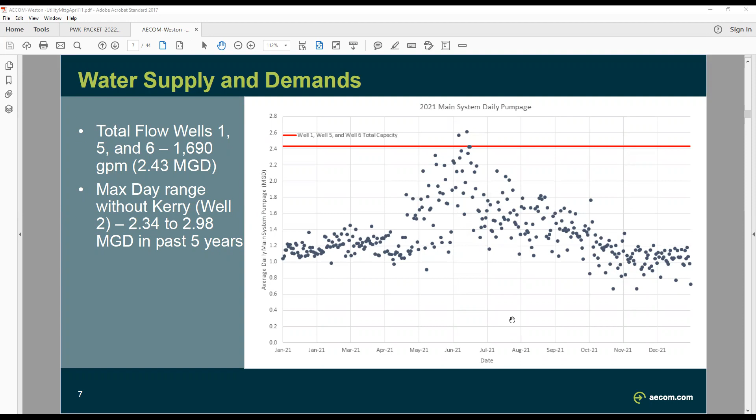I think we're getting off track here. Maybe we should let her get back to that in just a second when we get to treatment, because I think it'll be clearer when we show the treatment stuff.

So to start, we talked about short-term alternatives. Why do we have to have a short-term alternative? For long-term things, if you wanted to design something now for the future, we can't put something in for long-term right away. Most likely it's gonna be GAC, and equipment supplies are 22 weeks out. We can't just go out and get equipment in and have it in by July for a 20-year life. So we're looking at short-term alternatives. Also, wells 7 and 8 won't be available for the summer, so that's another reason why something short-term is needed. And if we were doing long-term operations, just getting regulatory approvals from PSC for a long-term solution would probably be prohibitive. So we looked at 3 alternatives right now for short-term.

So you mentioned demand reduction, doing some sort of public engagement or ordinance to reduce your water demands. But if it fails, if your levels get too low in your towers, someone's gonna have to start well 4, because that's the higher safety issue.

Basically, if you don't have enough water in your system and you were to drop pressure, you would have to send out a public notice to all your customers, and a pressure drop in your system would be very bad if you ran out of water. So running well 4 would be a better alternative if you hit that high demand period and didn't have enough water. That would result in a notice to all your customers. However, if you're successful, then you don't have to worry about that for the year. There is a concern about running 3 wells at high capacity for that longer period of time. It's hard on the equipment, so you could see some issues with that.

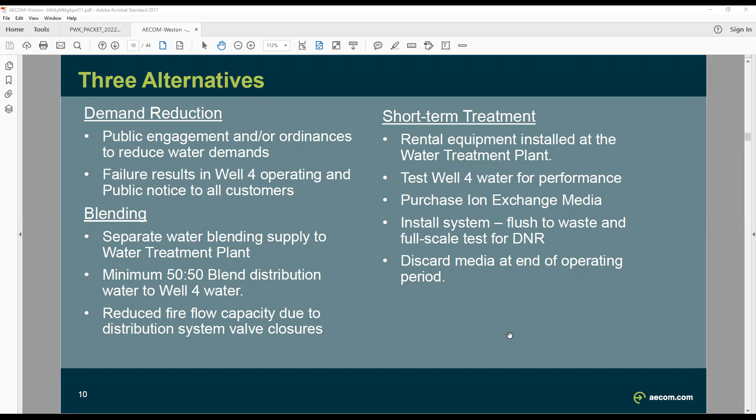The last option, and the least favored of the 3, is short-term treatment. There is rental equipment available. Sounds like not a ton available, but there is one available that could treat well 4 with ion exchange. We'll talk a bit about why that is in a moment. To do that, we flush to waste, and then at the end, when everything's done, we discard the media. So I talked a little bit about blending.

I had one quick question: if well 4 had to go online, that wouldn't need a notice, so what if it's below 20, say it was at 17? That's because the health index is above 1. Even though it's below 17 on individual compounds, there's a limit set for each compound. There are those 33 I mentioned, and not all 33 have limits, but some do. So if you're close to the limit on multiple compounds, it dings you. PFOS was one you guys were very high on. So you're really close on a couple of compounds, and you end up over 1 on your health index. In order to get below that, you have to blend the water, so yes, you would have to send that notice.

This information details on blending. The initial review was not what I was hoping to see, something great like a slam dunk, no problem. But no, it's gonna be a little more challenging.

We're doing the modeling review on that. There would be a new... that's one of the questions, I apologize. Is there any need to test more than once?

In other words, is it pretty definitive that you pull a test on that day and that's representative? Or does it make sense to look at, I don't know if this is seasonal. We just sampled again today, actually. In order to, how much effort is it, because when you turn it on, you have to plan where you're gonna send the waste to.

Yeah, so we blend it. We sampled today, but in order to do that we had to pump wells 3 and 4 to get our samples to the treatment plant. Then we pumped the treatment plant to sanitary, where we had to notify Rib Mountain Metro that we were gonna do that per the DNR request, that we couldn't pump it into the system or out into the yard anywhere. So that went to the sanitary, which goes to Rib Mountain Metro.

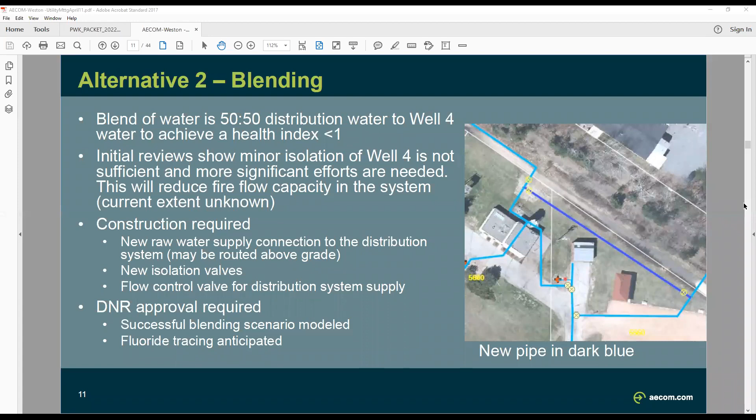Next, this is the short-term treatment. I wanted to explain where we've done short-term treatment before. In New Jersey we did a short-term process where we put in ion exchange. Ion exchange vessels are smaller, we can fit them in spaces better, and we can get equipment faster. However, long-term GAC tends to be more cost-effective.

This is an example of the alternatives analysis they went through for the evaluation, but I just wanted to show you what the equipment looks like. This is an example of ion exchange equipment, it's kind of short, a pressure tank. And above it is GAC equipment, much larger. Right now those are fairly challenging to get.

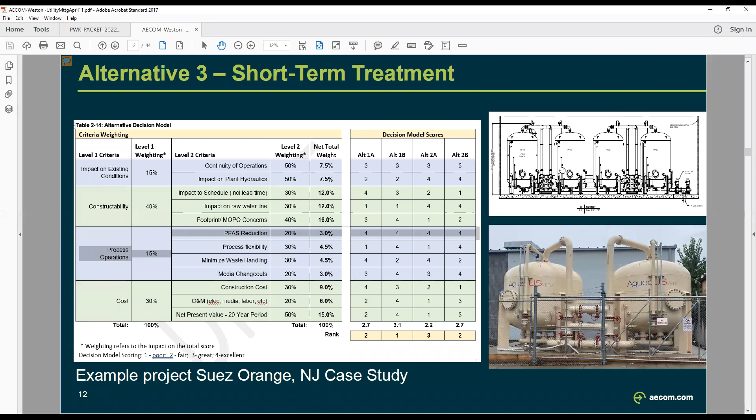So what's available right now is rental equipment for 4 vessels that could treat between 400 minimum and up to 748 maximum gallons per minute, depending on the loading rates we can get, our response from DNR, and our bench test. The rental cost is reasonable, $5,200 per month, plus mobilization fees.

But the problem is media purchase tends to be rather expensive, looking at maybe somewhere around 90,000. They don't know how much it would cost to actually ship it to the site, they gave us a cost for media but not shipment yet, so we're waiting for more costs. Media disposal will be determined, so when everything's said and done, you have to pay to get rid of this.

And that is where we want to make sure we're very careful about how we dispose of the media and where it goes, so we mitigate some long-term liability. The equipment will be housed in the existing treatment plant. With this type of equipment, the well would have to operate continuously because ion exchange media does not like to start and stop. It must be run at a continuous rate. Starting and stopping the media can change the bed, it's just not good.

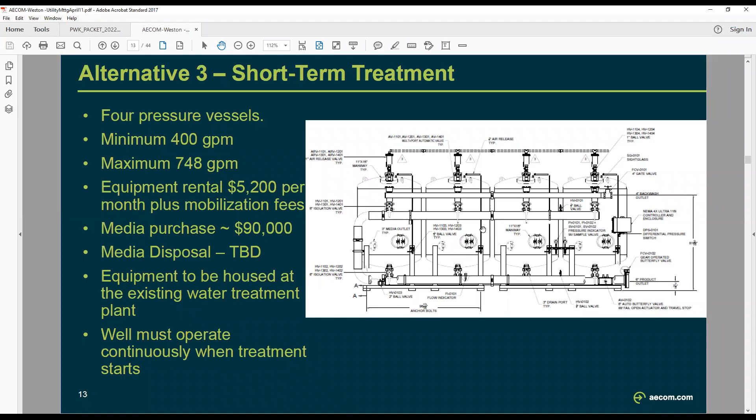We have requested quotes for short-term treatment equipment to find out exact costs and to meet regulatory requirements for posting contracts. Just a little bit about ion exchange. Basically, ion exchange removes all these good things, and as you go up, it's going to kick off other compounds as it starts preferentially removing PFAS.

If you are aware of the Central Sands region with Plover, Amherst, and Whiting, they all have nitrate treatment. If you look here, you've got nitrate. So it's similar to what they have for nitrate, but it's more selective. However, if you have nitrates or sulfates or other stuff in the water, it can change. That's why we're doing bench testing, to figure out what other stuff is in the water that might cause long-term issues. Sometimes nitrate, if it gets too high in your source water and it collects, it can do what's called dumping. We want to make sure that doesn't happen, that you don't have any weird water quality issues with your ion exchange treatment. That's one thing we do in the bench testing.

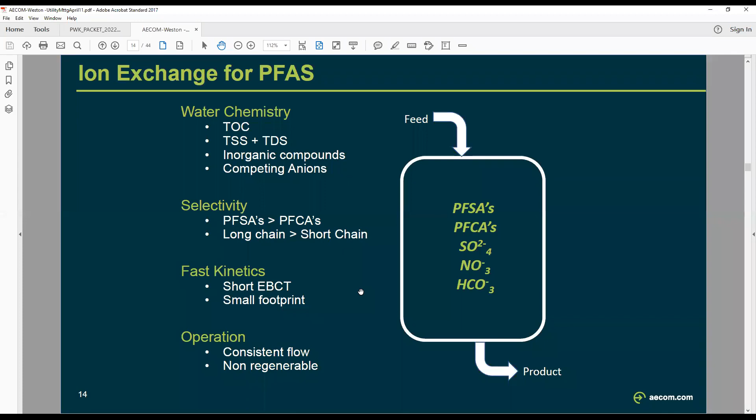One thing to note: if you have an at-home water softener, that's the opposite charged resin. It's removing hardness from your water. This doesn't remove hardness. At home, you can use salt to regenerate your water softener, but these can't be regenerated. You wouldn't want to anyway, because then you'd have to do something with the PFAS water, and that's just not good. So these are used to exhaustion, and then the solid media is removed and disposed, usually by incineration.

So you have manganese and iron, what about those? Manganese and iron are less of an issue — they would not be removed by the PFAS ion exchange media. Those would typically be removed by chlorination and then running it through an activated media like pyrolusite, manganese greensand. That backwash water, if it's done after PFAS removal treatment, would not have PFAS in it. If it's done before that time, it would have whatever's in the raw water in that backwash waste.

Typically wastewater plants don't mind iron and manganese at all. It's PFAS that they're concerned about — they're kind of in the same boat as many other folks, just trying to figure out what to do next. So as far as iron and manganese treatment, wastewater disposal is typically not a concern for the iron and manganese in the water. I think that should be part of the design.

For well 3, it would be. Right now, I'm just looking at well 4 for a short-term treatment process. Like I mentioned, we only have capacity for between 400 and a little under 750, and that's the capacity of well 4, which has the least amount of PFAS and no iron and manganese to treat ahead of time. So it makes it a much faster short-term option than long-term treatment.

But for long-term treatment, you're correct — you'd want to see iron and manganese removal. It'll help protect your ion exchange media if you remove that before you get to that media for well 3. Well 4, I believe the iron and manganese was below detect. So well 4, Sternberg, is much better water quality than Mesker, which is well 3.

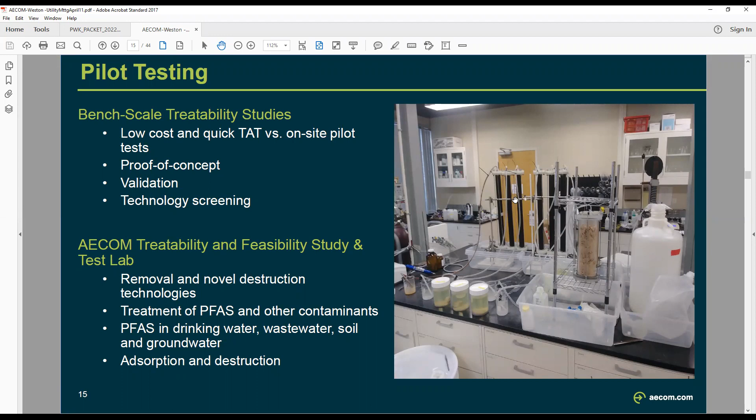So bench testing, just a little picture of what it looks like. We're going to run the water through tests. We'll do a full water sampling test that'll give us the information for ion exchange. The other option is GAC, and we run it through these little columns here, which you can kind of see on the screen. I won't go through all the data, but just know that. So I mentioned how much it takes to actually destroy it.

We're adsorbing this PFAS onto carbon or onto ion exchange media, but that doesn't actually destroy it. You can see this little tank here — we have two specialized plates that they put in the tank, and then they add electricity to the tank, and you can watch the color change. The fluorine-carbon bond is quite literally severed, but it takes a lot of energy for a little container, so you can imagine it's not really suitable for a large volume. But there are methods they're developing to actually destroy the compounds. I just realized how hard it is to destroy — that's kind of the reason why I put that in there.

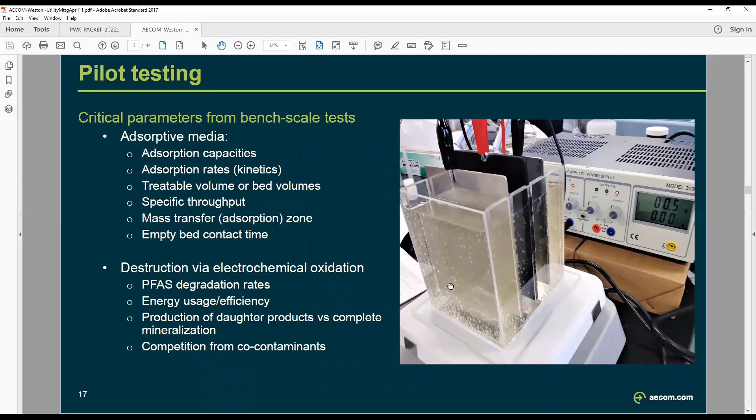Just a little bit else on some of our equipment that we have in the lab to do the tests.

So long-term treatment options, that's the short term goal to get you through the summer. Then the next step is what are you doing long-term. This week, the well 7 and 8 new well and building will be open for bids on Wednesday. We're hoping to see some great bids come in, a lot of activity, a lot of interest.

The idea here is that those two new wells will hopefully get you some additional capacity short term. Another option would be to construct a new well to replace wells 3 and 4 long term if that was the choice. There's no guarantee any well you select anywhere will not have PFAS - that's one reason why with well 7 and 8 we will be testing. And well capacity can be challenging, I'll talk about more of that in a second.

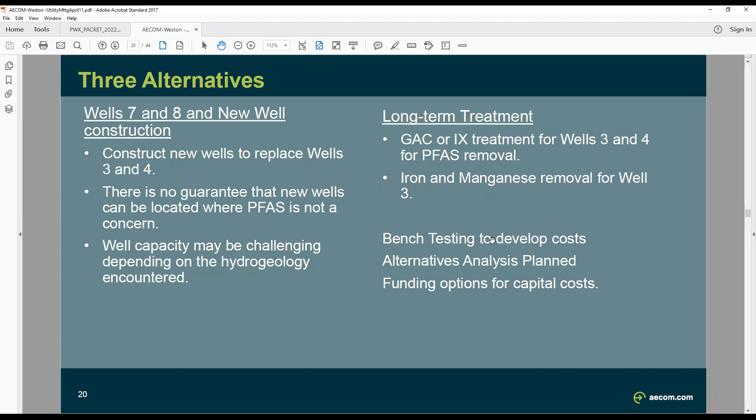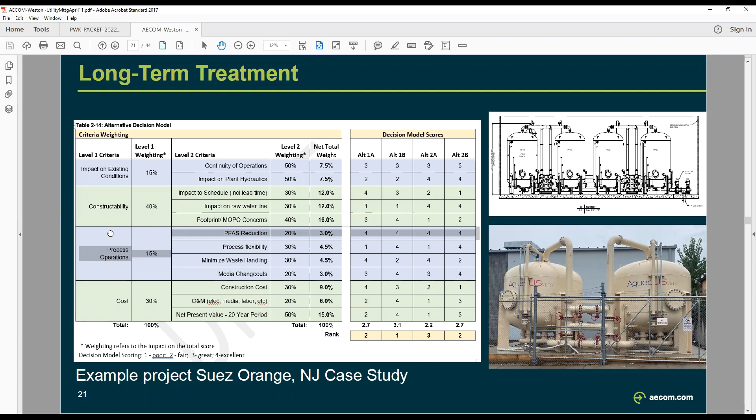Long-term treatment options include iron, GAC and ion exchange, and then iron and manganese removal. In all these cases, we'd want to bench test to develop the costs, look at alternatives analysis, and do some funding review. For alternatives analysis, we're looking at both cost, life cycle, capital cost, and also things such as constructibility and treatment performance in different non-cost factors.

So I already talked about pilot testing well 4, then well 7 and 8, which is heading to bid right now, opening Wednesday. Well 7 and 8 should be constructed this summer, then tested for PFAS. After we get PFAS results back that are favorable, we'll start construction on the well building. The wells are hopefully going to be ready by May of 2023 to provide water to the system.

So by this time next year, you should not be looking at a summer of concern - you should have that additional water supply available. We are anticipating that some other portions of the well may go beyond that. Currently there's some sourcing issues with generators - the generator may not be in the building before May comes next year because of some supply chain issues. But we're tracking that, and hopefully when we get the successful bidder, we can make some good schedule plans.

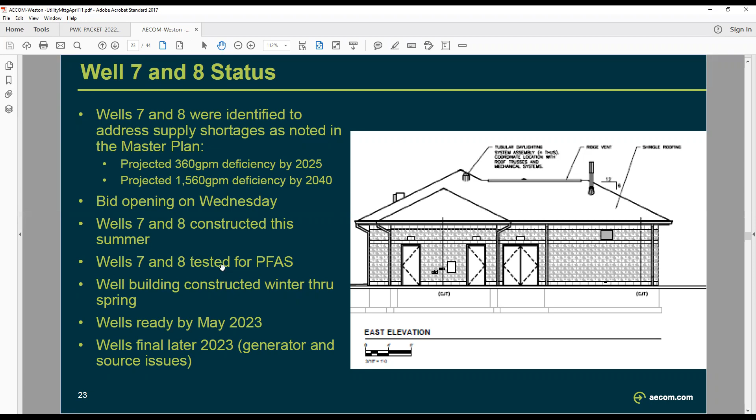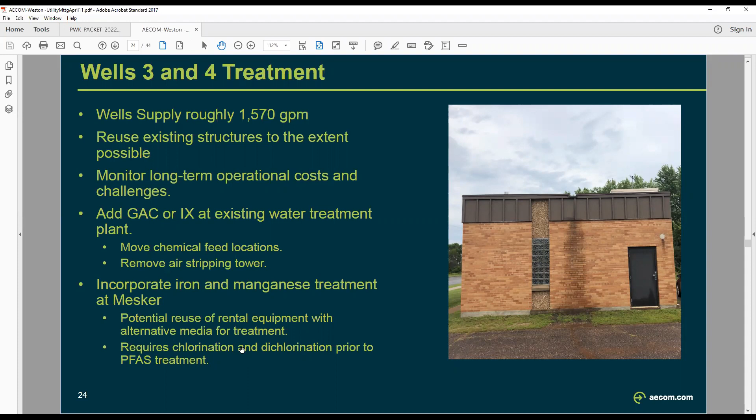And then the existing GAC or ion exchange at the existing water treatment plant - the existing plant was designed for GAC vessels, some tall vessels, so it should be pretty reasonable to get those new vessels in there. We would have to move chemical feed systems, and we would remove the air stripper for PFAS. We would incorporate the iron and manganese, and one item to note is that we probably have to chlorinate and then dechlorinate before PFAS treatment, just because both GAC and ion exchange do not like chlorine at all.

This is a picture of the treatment plant. You can see this tall area here is actually the area that was originally designed for GAC vessels and has enough head capacity for that.

So on to funding - the good news is that there is funding out there. Safe Drinking Water Loan Program is available. We have to get cost estimates and an intent to apply. The ITA is intent to apply, and PERF is the project evaluation and ranking forms, completed by October 31st. This is low interest loans and principal forgiveness.

I bring this up because of special funding options here. The requirements for this are disadvantaged business, wage rates, and then Buy American, which means we would have to be careful with where we're getting our materials from and make sure they're all American-made materials. I just finished helping the Village of Clover with their safe drinking water loan, and I've done a number in the past.

The reason why this is really interesting is right now the Infrastructure Investment and Jobs Act has put a lot more money into this program. So the money we're talking about is for transportation as well as water, even bridges. And you might hear some communication companies are excited because they can get communication lines run in rural areas with some grants from this as well.

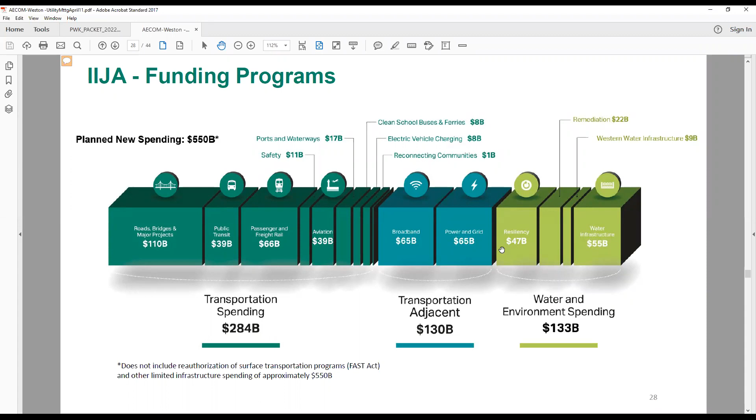But looking at water specifically, let's skip ahead a little bit. There's about 10 billion in collective funding to support projects that address emerging contaminants like PFAS. Of that, talking with DNR, they're looking at getting $13 million into their program for safe drinking water loan funds, specifically for PFAS treatment.

They're also talking 13 million for the general fund for the safe drinking water loan program. These are still kind of in the works, they're trying to still figure out the last bits of how everything's going to shake out, but that's per year for 5 years.

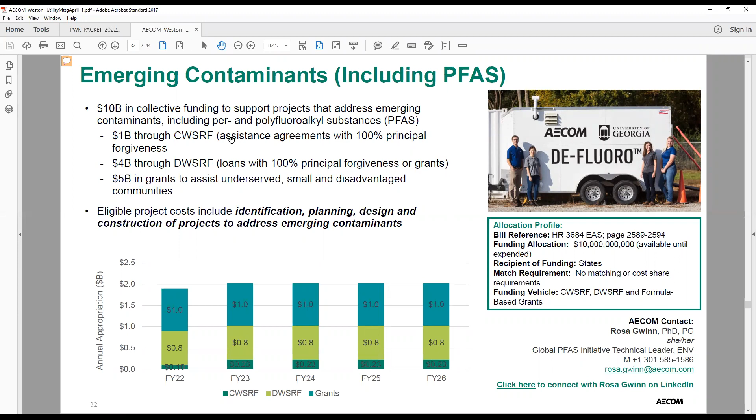So looking at when funding might occur, my guess is there's going to be a number of utilities that want to get into the mix. However, there's going to be multiple years of opportunity to be part of that program to get funding. This is funding for your capital costs, so funding for your equipment. This would not fund your long-term operational costs, which can be kind of high because you have to replace that media every so often when it gets exhausted, and you have to dispose of that media. So those are the things you have to weigh, and that's what we'll put in the alternative analysis.

Other things to note is that you can stack interest. So if let's say we don't get where we want on the safe drinking water loan program, there's other ways we can do to get funding for this.

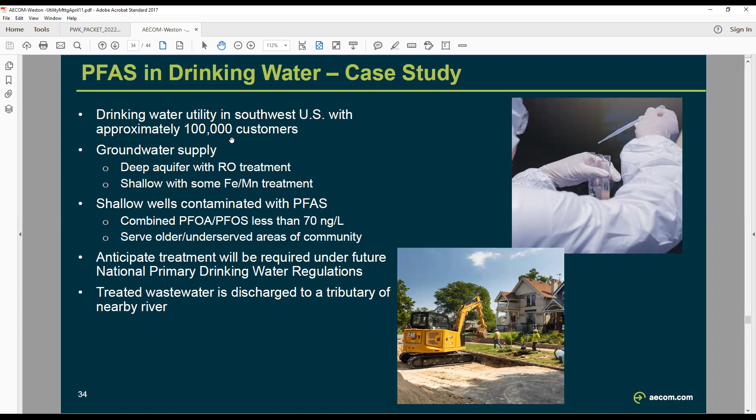There's an example, I don't know if you have this in your packet, but we'll come around so you can see this. Basically, if you show that now that you remove the PFAS from the water, it's also not going to the wastewater plant, so now you can take credit for the fact that it's staying out of the river. And then you can get yet different funding for those different ones.

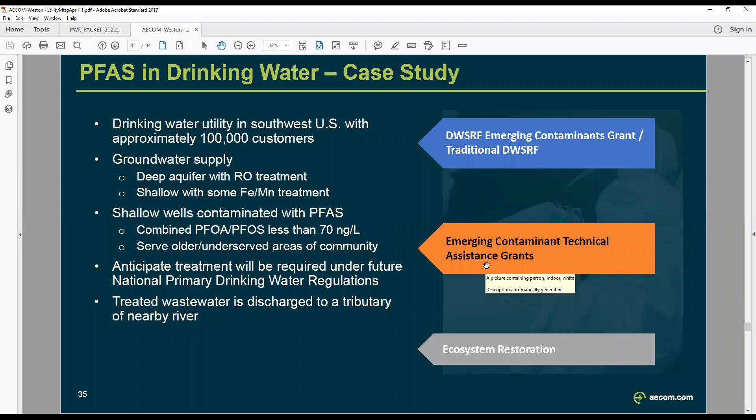So you can get that for, here's some examples: you can do the revolving fund, which would be our safe drinking water loan fund, you can look at technical assistance grants specifically, and then you could also look at ecosystem restoration grants and monies. So there's lots of different options. In this case, this utility was looking at doing a number of different grants over time to try to meet their funding goals.

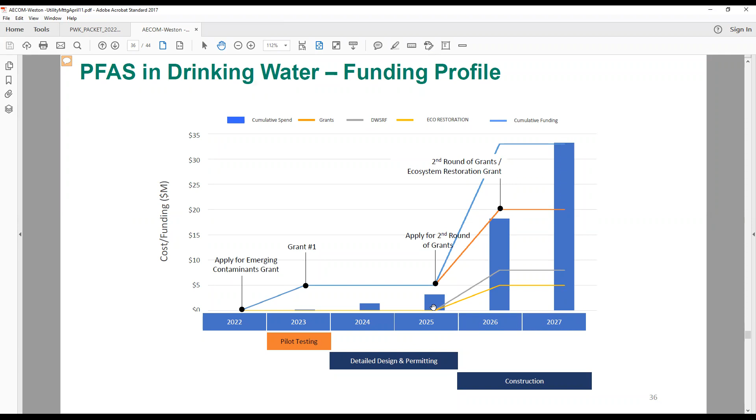And part of that program, just so you're aware, for the selection process, engineering is based on qualifications. It's a qualifications-based selection process. So I put our qualifications in there, so hopefully you feel comfortable. And if you have questions, you can ask and feel comfortable, and hopefully we'll be able to get you what you need within a timely frame.

So there's information there on where we've done work all over the US, the type of work we've done. We do work as far as finding the sources where things are going. We help regulators as far as developing different regulatory frameworks, doing research, such as the defluoro tank that's actually destroying the PFAS, and then of course doing treatment and water system help. We also do public outreach and communications.

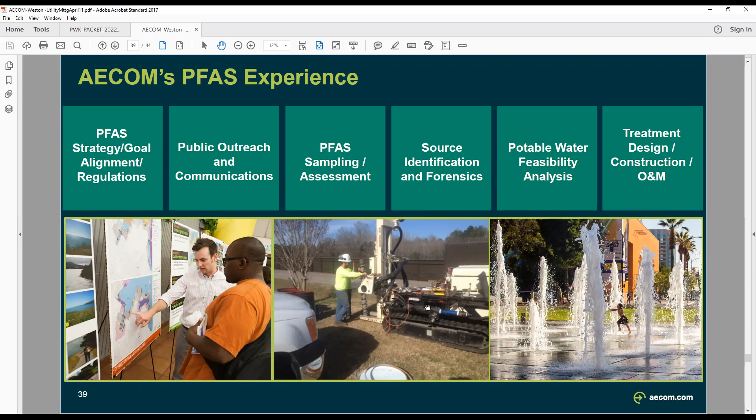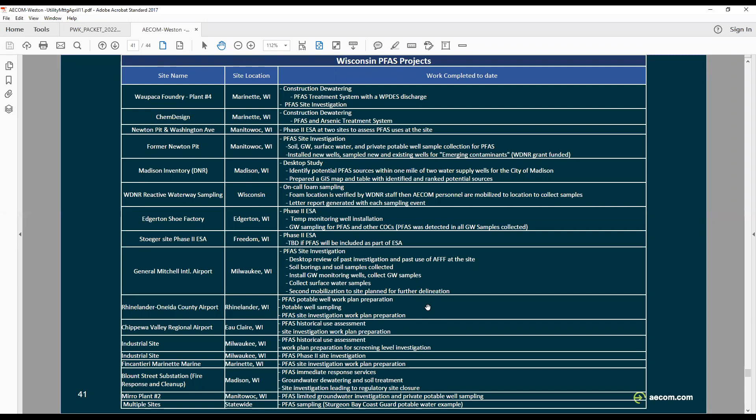This is our PFAS projects in Wisconsin. We have not done a drinking water treatment process for PFAS in Wisconsin. We've done lots of other processes, but this is our PFAS work related to dewatering other areas, sampling different sites or sources. And when I mean sample, it's not like just a one-off sample, it's usually a pretty substantial sample at that location. All of our little onesie-twosie samples aren't shown on here, it's more robust sampling programs.

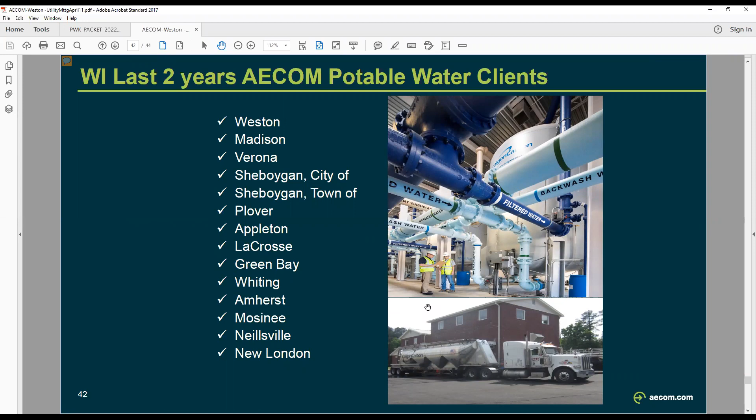And then for drinking water, these are the utilities I've worked with in the past 2 years. I've been working with Weston on the master plan, and then a number of other utilities in the past 2 years I've been supporting in different ways. So I'm aware of the market and PSC and some of those excitement things.

I do mention an optional item: if there's a desire to have any support for your communications programs or communications needs, please let us know. That is another way we can support our clients and customers.

So with respect to the funding, we were sent an email by Kyle Burton of the Wisconsin DNR on Thursday, late afternoon, saying that through the programmatic and congressionally directed appropriation process, some discretionary money, our elected officials in Congress can apply for funding for fiscal year 2023. We received this on Thursday afternoon, and also understood that the application deadline was Sunday, April 10th at midnight Eastern Standard Time.

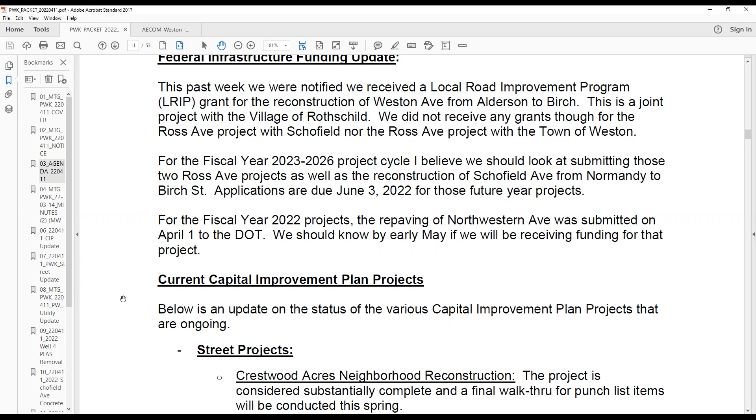The roadway's preliminary design is just a 2-lane road with a multi-use path, not a 4-lane highway. Yes, but I'm wondering why it's so high. It's just the estimate at this time, right? Yeah, we got 50%. So the estimate was just shy of 1.5 million. 733 is half of it.

I get my number, yeah, we got 733, so double that—that was the total estimated cost for the roadway, 1.4 million. It is heavy clay soil, so there's some extra excavation work to dig out the bad soils, using fabric, breaker run and base to build that back up. So it is a longer term road. But at the end of the day, if the project costs come in less, that's great.

The grant is still there—when you apply for grants, you can't ask for more money, but if your estimate ends up being high, they usually don't take money away either. So we can get up to 50% of the project cost covered by the grant. If somehow the project comes in at 1 million instead of 1.4 million, we can still use the full 733 for the grant. They don't take it away, but if the project came in at 2 million, now we have less money there for the total project cost.

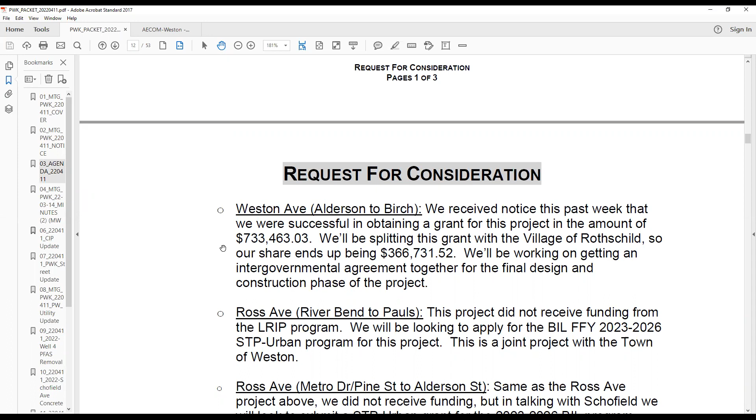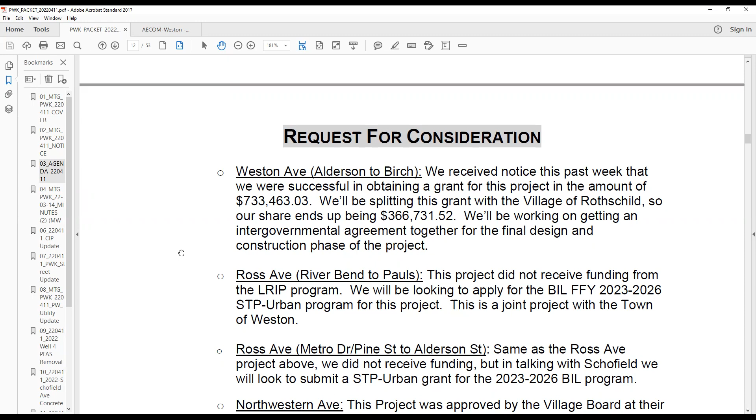On the flip side, we did not get grants for the 2 Ross Avenue projects - the one with Schofield between Metro and Alderson Street, nor the one with the town of Weston from Riverbend out to Paul's, past Machmueller Park. So we'd be looking to resubmit those projects as part of the STP urban program through the bipartisan infrastructure law for the fiscal year 23 through 26 program cycle. Those applications are due June 3rd, a little less than 2 months from now. Along with that, we'd likely include Schofield Avenue from Normandy to Birch Street, so we'll be putting together 3 grant applications for that June 3rd date.

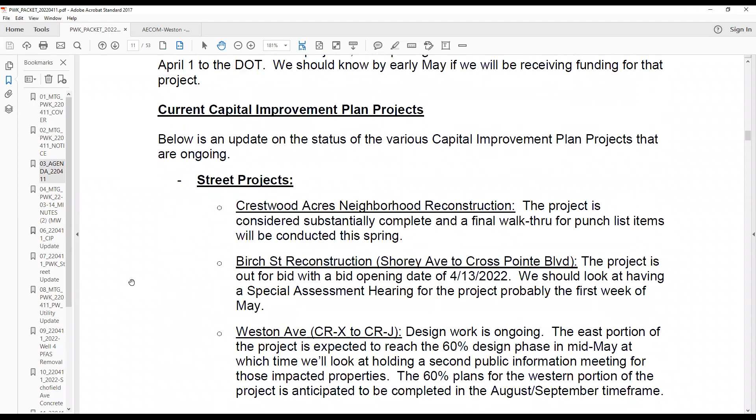The Apache Lane project got started last week. They're about a quarter of the way done with the sanitary main, and I'll be sending out weekly email updates, with the committee and board included, in case you're curious on the status of that project.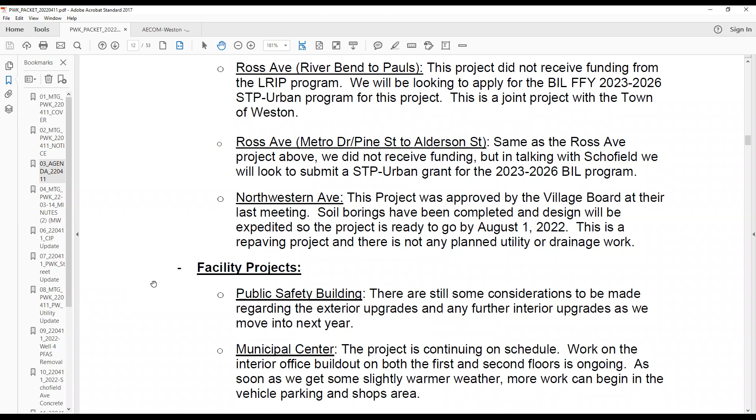For Northwestern Avenue, we submitted a grant on April 1st for fiscal year 2022 funding. That's strictly repaving the road from just west of Camp Phillips Road out to the city of Wausau village limits. I don't believe many communities were able to submit anything due to the tight time frame and limited scope of the project. We should find out if we received any grant funding around May 1st, and that would be a repaving project for 2023 next year.

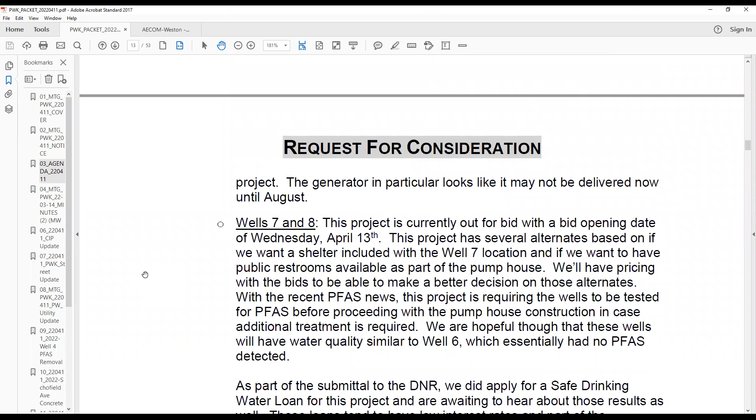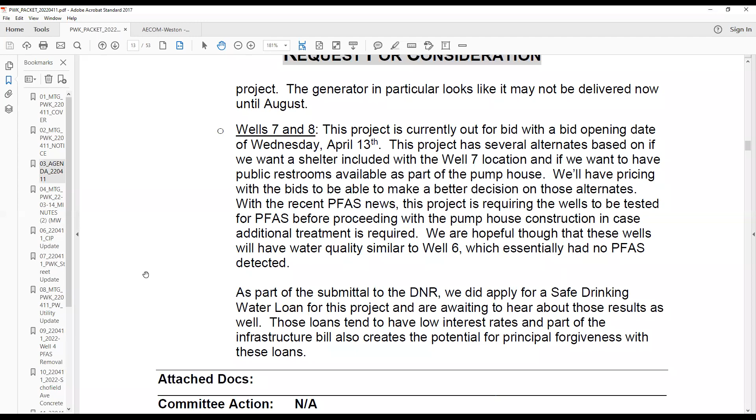Angel touched on well 7 and 8 - that bid opening is this coming Wednesday. We also applied for the safe drinking water loan as we were submitting that project too. So that's maybe the highlights of the capital projects we have going on right now.

Any questions? As far as Crestwood Acres, do you know when they will start with tree replacement or anything like that? I'll have to check, I don't know off the top of my head right now. I believe the order was placed either last week or 2 weeks ago, and generally that would be like a springtime thing.

We still have a final walkthrough to do on that. I know there's a couple concrete approaches that have cracks in them and other restoration cleanup items, but we're waiting for winter to finally leave so we can see how things went. I think during the spring melt, the drainage and everything we put in there seemed to work pretty well. Living there, did you notice any difference? I didn't have anybody calling me saying you guys messed everything up, now I have this big problem - I used to have no problem or a little problem, so that's a good thing.

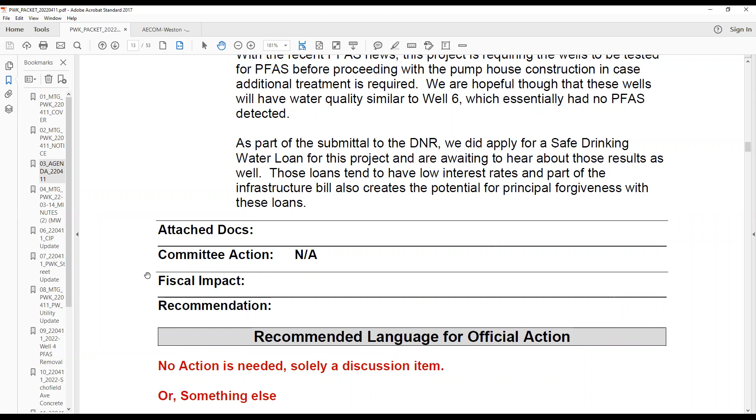Anything else? Anybody else have questions? Okay, street operations?

We're praying for winter to end, we'll see what this week brings - they're talking 25 for a low Thursday and Friday, but we're kind of transitioning. We've been out sweeping streets when we can and doing some brushing and stuff, and we're gonna start getting into our summer activities. There's inlets and stuff to fix - when you go out sweeping you'll sometimes see holes next to storm inlets, so that's starting to come into play. We've got a storm sewer project we're gonna get started with down the line on Normandy Street between Hughes and Foothill, putting some storm sewer in there, nothing too big, just kind of gearing up for summer and easing into it.

Basically, kind of just in the middle of it. One of the things...

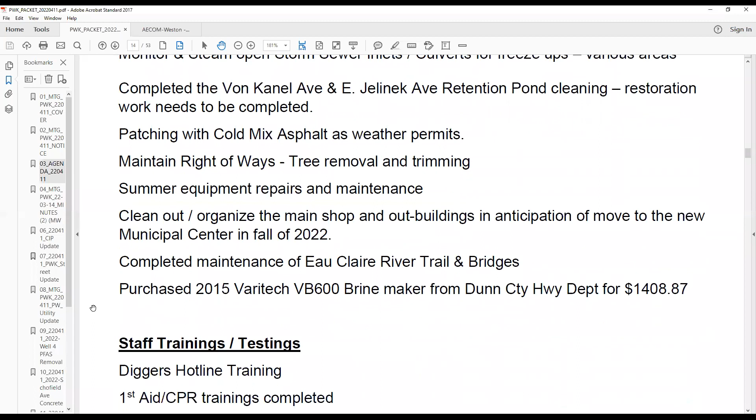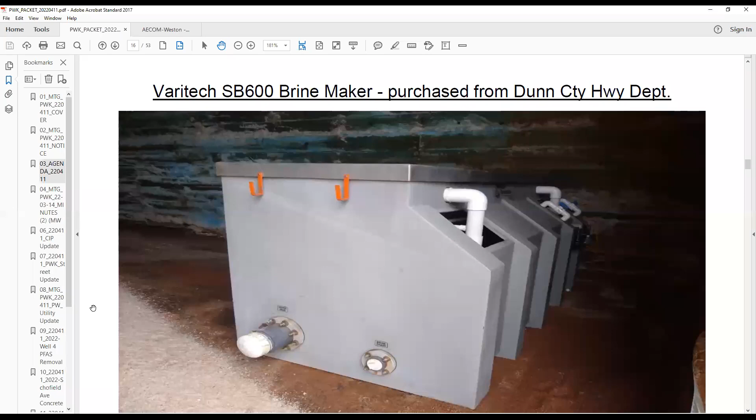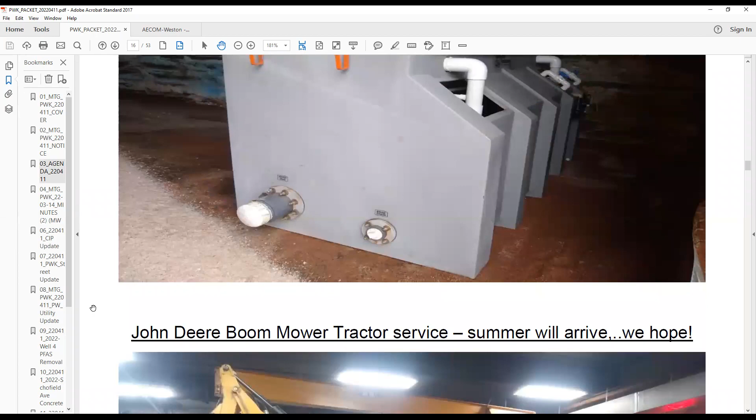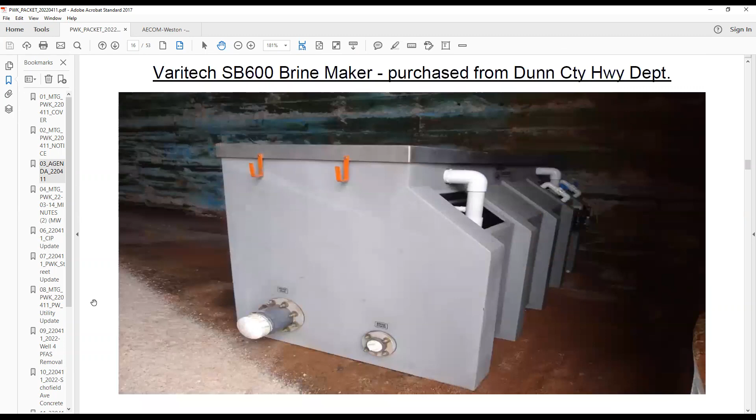We purchased a Varitech VV600 brine maker. It was on the Wisconsin Surplus online auction, came from Dunn County Highway Department, and I think we got a pretty good deal, paid like $1,400 for it. They've been around for a while, it's a 2015 model. We had these back when I was at the Highway Department. They're actually a pretty simple operation and will work perfect for what we need as far as salt brine. We didn't have to spend a lot of money and got a good product. Dunn County was getting rid of it because Wisconsin DOT bought them a fancier system since they have Highway 94 running through the county and use more blended mixes. Salt brine is adequate for what we're doing, we don't need to get too carried away with other things, so that was kind of fun.

We're starting to clean out some of the shop too, going through some stuff up here where eventually we'll move into the new building. There's old parts and things they're finding that we'll probably be getting rid of. Doing some maintenance on our other tractors and stuff, getting ready for summer.

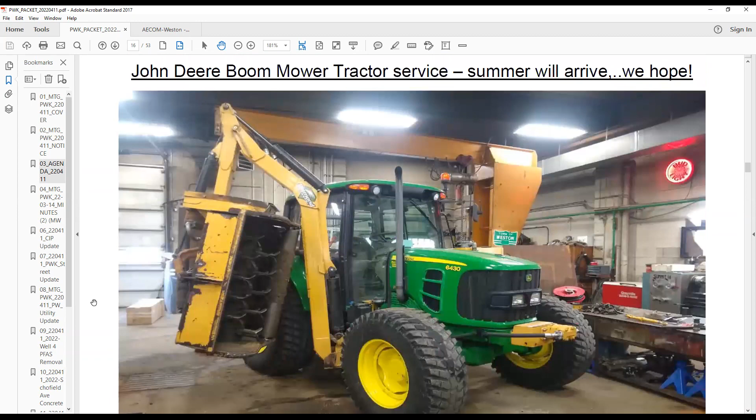Other than that, trying to keep up with patching. The rain's really been a killer. We're out today, tomorrow we're gonna be patching and try to get as much done before the next monsoon, it's Wednesday into Thursday. Sounds like we're supposed to get an inch plus.

As far as frost in the roads, I stay in contact with the Highway Department, Marathon County, and the heavy soils. There was 5 feet total of frost in the roads this winter. The top 2.5 feet is out as of last week, but there was still 2+ feet of frost down below. If you drive the heavier soil roads like Birch Street, or even I was down on Jones on the south side of Weston today, a granite road, it's still heaved really bad.

So we've been holding the weight limit pretty tight as far as giving out permits for people to run, especially on the heavier roads. We're trying to keep the weights down so they're not damaging anything, and we've been pretty successful. We need some dry weather and some warm weather to try and knock the rest of that frost out and get us to where we can start doing things. As far as even grading some of the granite roads, you can't even grade them right now. So just kind of keep up with everything, get ready for the next projects.

Good question, I have a question for you. We got this telephone box, which telephone company, they don't use it anymore, this green box - in the right of way, you mean the pedestals? Yeah, and the wire's falling down from it, or they're open. Why aren't they removing it?

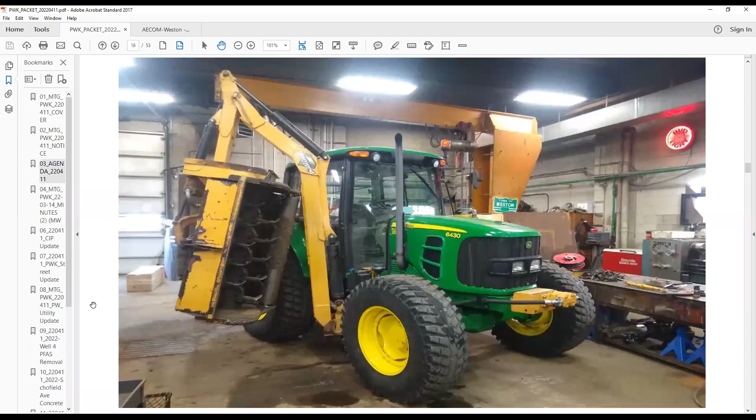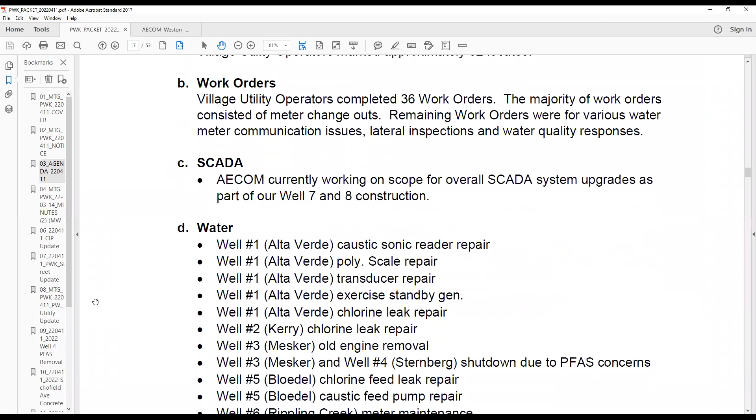Utility operation update: March was dominated by PFAS, but outside of that, our operators saw an uptick in some of our Digger's Hotline locates and work orders. Our SCADA system is currently being worked on with AECOM getting designed.

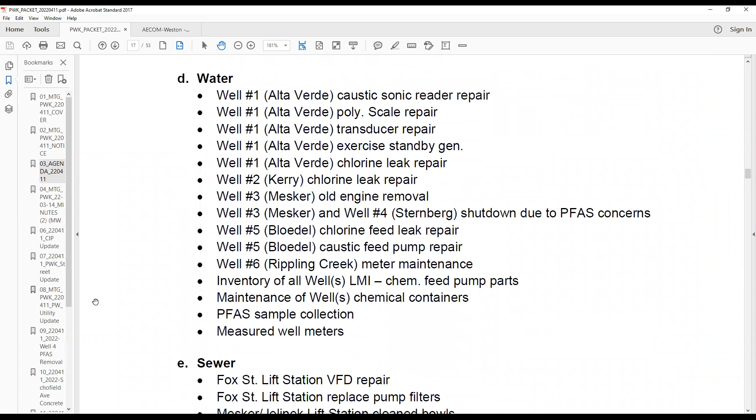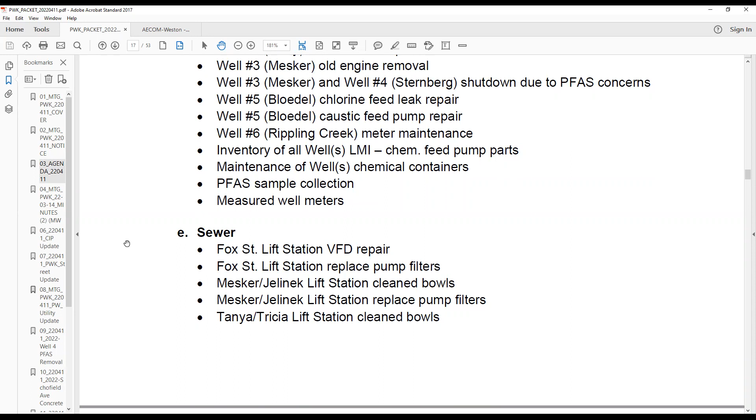On the water side of things, the guys have been able to spend a lot of time doing some miscellaneous well maintenance on some of the feed lines and some of the scales. Our PFAS sample collection was conducted on the 2nd of March. Results came back mid-month and we went from there with discussions with DNR and everybody.

On the sewer side of things, we have a sewer lining project that MyTech's gonna be starting up on. We're currently trying to get the stretch from Meadow Rock on Camp Phillips, going from Meadow Rock down to Shorey and Shorey over to Bushka. We're gonna be lining that portion of our sanitary, so our guys are currently cleaning and televising it to get that video over to MyTech to review prior to lining.

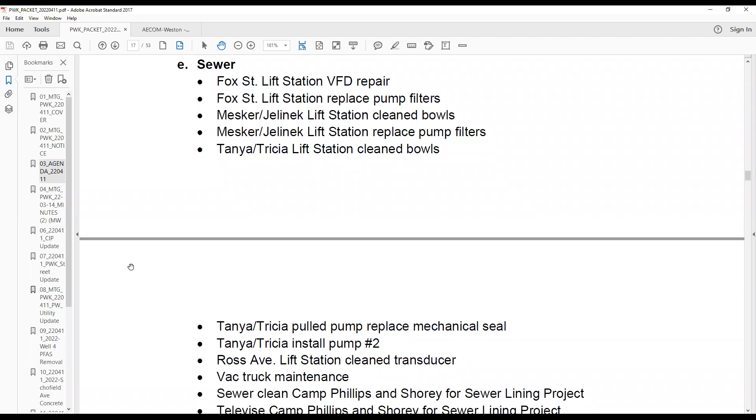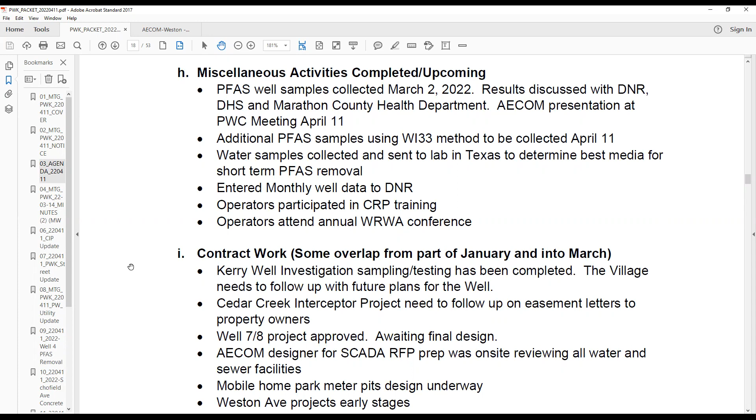Some of the miscellaneous stuff - PFAS again - we took our second round of samples today. Our first round of samples collected early March was method 537.1, which brings in 18 compounds. Then you pick and choose which ones are calculated into some of the numbers that Angel was touching on.

This Wisconsin 33 method actually incorporates a few other compounds that will add a little more potentially - it looks at 4 additional compounds that aren't looked at with method 537.1. So we'll see if that makes any impact to some of our other wells as well.

The guys also ran well 4 in particular to see what we could dial it down to, and what kind of pressures we had should we get our short-term treatment put in there. We also took 7 5-gallon carboys of water that we're sending down to the AECOM lab in Texas, where they'll be doing some analysis to determine what type of media best to use.

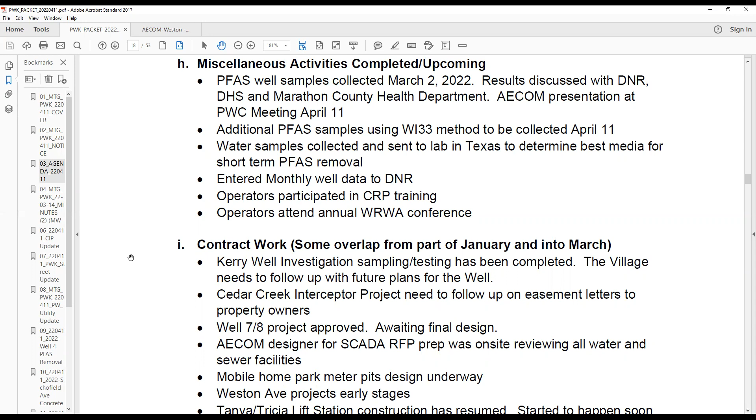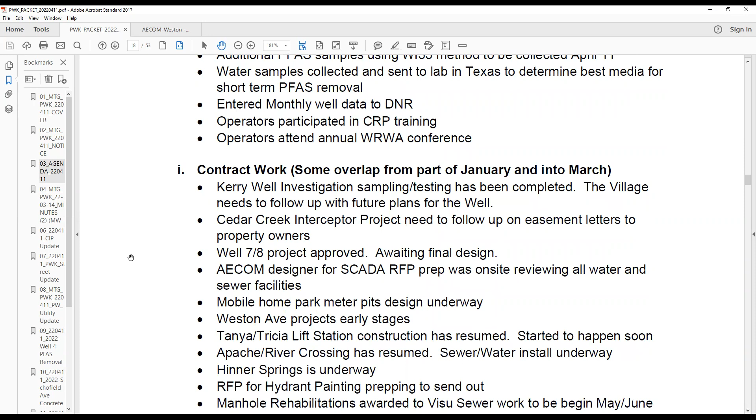We today discussed potentially starting up some of our valve exercising work. Not sure if that's a good thing or not with some of the issues we may have with our modeling that we're trying to do for diverting some of our distribution water into blending with well 4.

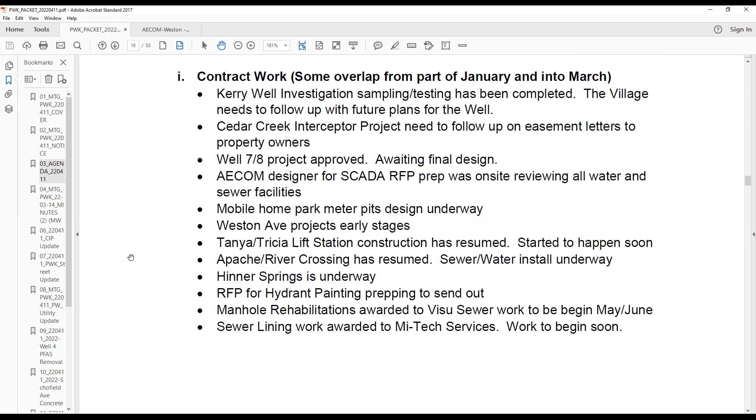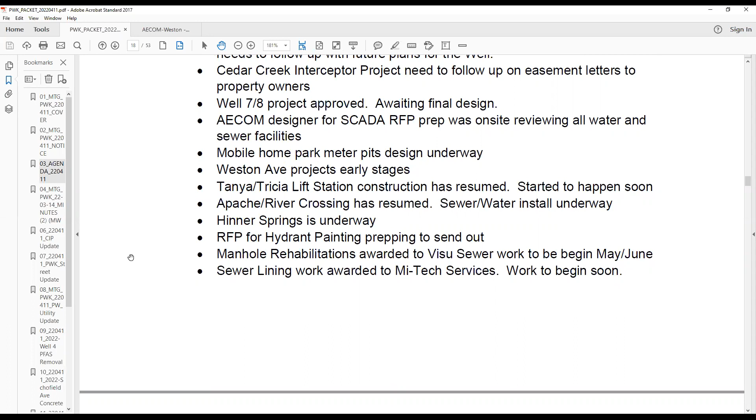I guess Michael touched on most of our contract work. A couple other items: our Tanya Tricia lift station resumed, and some of the wiring was getting done today. Talking with Pember, the contractor, they said we should probably start discussions about a startup on that. So we'll probably be getting with our engineer to set up a day where we can get a startup on that new lift station.

Other items, I'll be sending out our hydrant painting RFP hopefully this week. I talked with Visu Sewer, who was awarded our manhole rehab project last year, that they couldn't get to it on their schedule. They said they'd be getting to us probably May, so that should be on our schedule hopefully coming up soon. Then I mentioned Mi-Tech with our sewer lining work. Then the rest of it, we have our customers added for last month, and then our water pump trends and wastewater flows, lift station hours, then our Aquahawk usage.

So that sewer line, you just give it to them or it was a bid? No, it was bid. What was the bid result? The one for Visu Sewer? Yeah. Yeah, we brought that.

No, for Mi-Tech's sewer lining? Yeah, so we had a couple quotes for the engineering services, and then we'll be putting that project out to bid for a contractor to actually perform the work. Yeah, they won the design, I should have said, yes. Yes, so Mi-Tech is doing the lining design, and then that project will be bid out for lining with the various contractors out there.

Various contractors. Mi-Tech is, as far as I know, is the only one. Yeah, but there are other companies that do this, like Great Lakes Televising, they line sewers, Visu Sewer lines sewers, there are other lining companies out there. Okay, any questions?

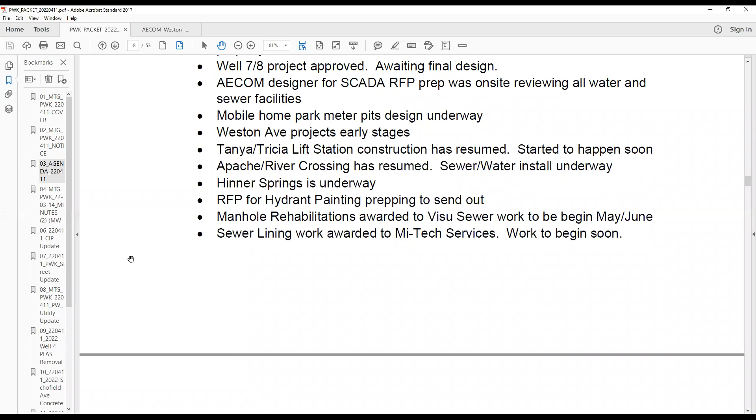All right, all this discussion on recommendation. Item 9, well number 4, PFAS bench testing proposal. What's your wishes?

Michael, do you have to add anything to it? Yeah, I guess Angel pretty much covered what the purpose of this is, to evaluate what is the best removal method for the PFAS based on our water. It's not a one size fits all, so you have to look at the various filter medias out there and see which one is most successful at treating the water that we have here.

They'll look at granulated activated carbon as well as ion exchange as part of the process. Again, I think Angel, you said it, take it down, we're looking at trying to get to zero. So if that standard comes back and it's 10 or 5 or whatever the number is, we know we can treat our water to this level at least.

So yeah, and as we said at the end of the presentation, I think this is the thing we should do. At this point, we have authorized them to begin. We collected samples, they're being sent to Texas and so forth.

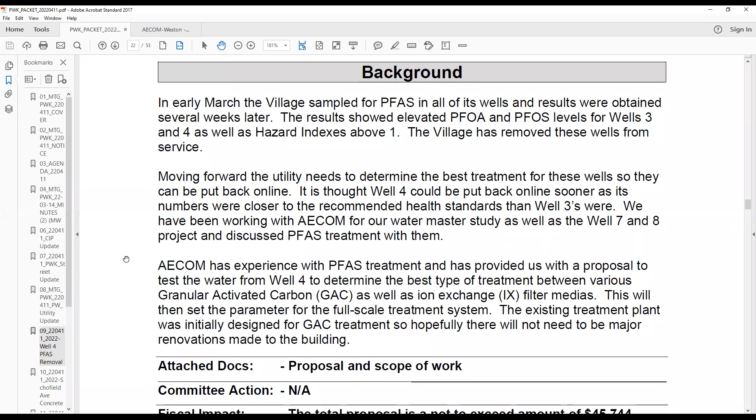So we have two choices, I guess, or choices I suppose, is how we fund this ourselves without knowing if we're going to have outside funding. One is that we do have a budget in the utility operation for engineering studies. The other thing we could do is recommend to the board that we consider using some of our American Rescue and Recovery Plan Act allocation.

To pay for this if we don't have any other source of funding through other grants, from the state for instance, or from the federal government, if somehow what we have authorized to be spent here or planned to authorize in fiscal year 2022, which would be this engineering studies, it would not be covered by this grant source I mentioned earlier. That was also part of that application, was indicating what we had authorized in 2022.

So you already applied for a grant, right?

Through Senator Baldwin's office, or through the Senate, from additional appropriations, I guess. So we'll see where that goes. There's no guarantees. In the meantime, just know that we do have a source through our normal utility budgeting, which has been adopted for the year.

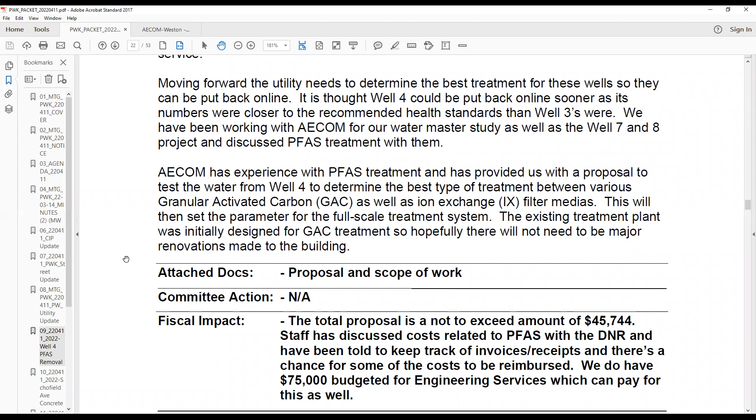I'll make a motion to recommend the village board approve a contract with AECOM for the bench scale treatability study for PFAS removal for well 4, for an amount not to exceed $45,744, and that the board consider whatever cost mitigation grants might be available. I second. Discussion?

Nate, are you there? He's still online. Yeah, I can see his phone there.

Okay, if there's no question or discussion, all in favor signify by saying aye. Aye. Opposed? I have it, thank you.

Item 10, 2022 Schofield Avenue pavement maintenance, Lasker to Ryan.

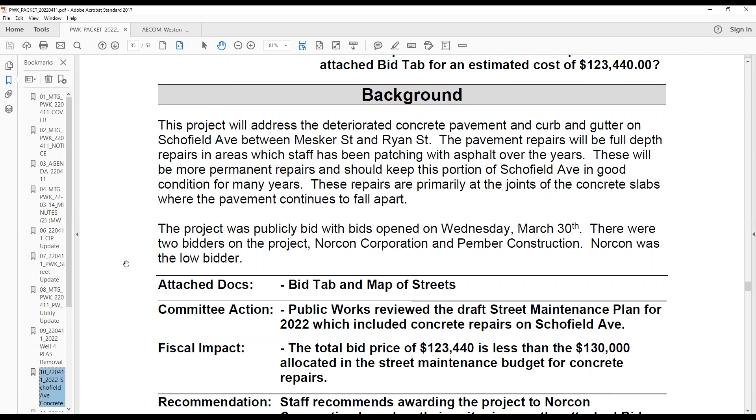So part of the 2022 street maintenance program, we're looking at concrete joint replacements. We had a bid opening two weeks ago and had two bidders on the project, Norcon Corporation and Pember. Norcon was the low bidder at $123,440, compared to Pember at $222,017. So it's almost double.

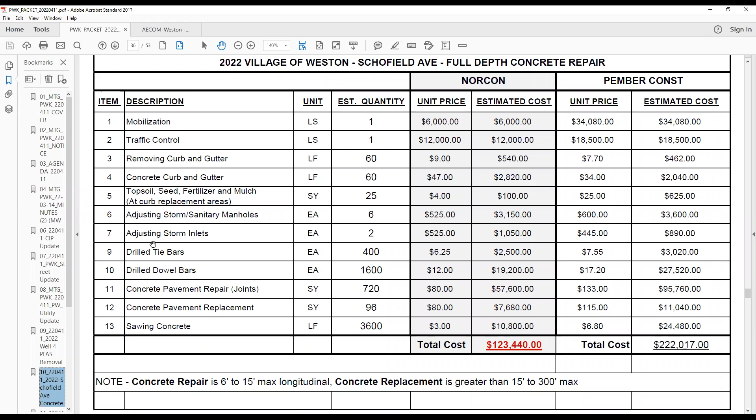I was wondering how. I'd look at all the numbers, that's a significant difference, but that's what he wants to do. So our recommendation is to move forward with Norcon. For our concrete repairs in the street maintenance budget, we had $130,000 budgeted, so the estimated cost of $123,440 fits within what we had budgeted for that work.

To clarify, it would be from Mesker out to Ryan, this stretch of Schofield Ave. Primarily there's a lot of bad spots over by Teagan and Old Costa. What about the rest of it? We've got some problems in that area also. We do.

We're trying to work within what monies we have available. So next year we'll probably look at, strategically, doing the eastbound lanes and maybe start westbound coming back this way. Then next year, if we have other spots from Camp Phillips coming this way, we can do those. Unless you want us to try to do more, I guess we just need to. Well, you probably gotta drive it to see the condition, how it is. I've got it logged all the way from Camp Phillips out.

So we're talking about from Business 51 to Mesker. Yeah, from Business 51 to Birch Street, that's where we talked about putting Schofield Ave as a grant project, reconstructing that in a few years, because we're going to keep chasing that section in particular. Getting that into the capital improvement plan helps us know we can do temporary fixes as they come up, but we won't invest our major maintenance dollars in that section anymore. We'll focus on keeping the rest in good shape so you don't just throw money at issues and then suddenly everything's going poorly, versus having a known section you're going to focus on getting reconstructed in the near term. If you follow that.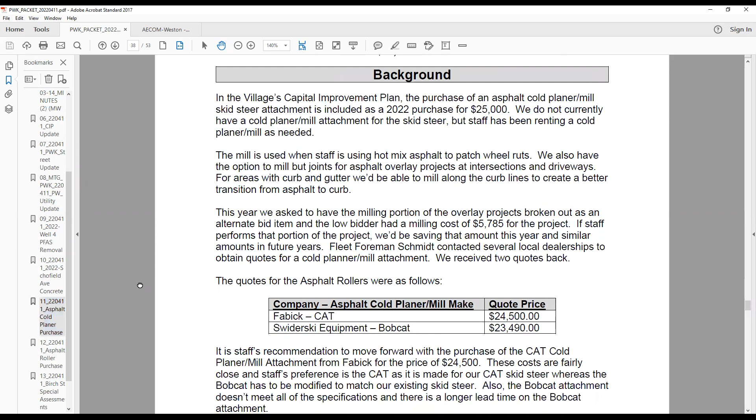Since we bought the new skid steer last year, it's got a high flow kit on it, it's a track machine with rubber tracks. We rented a milling head, a cold planer as they call it, last year and used it. There's a definite need for it in places. If you drive Jelnik from Business 51 coming back, some of the areas where we're having stripping issues, this is a unit that's 24 inches wide. We can set her down, mill out those bad spots. We have the hot box patch trailer, go down to RC, get some hot mix, put it in, and do a permanent patch that's going to last a long time.

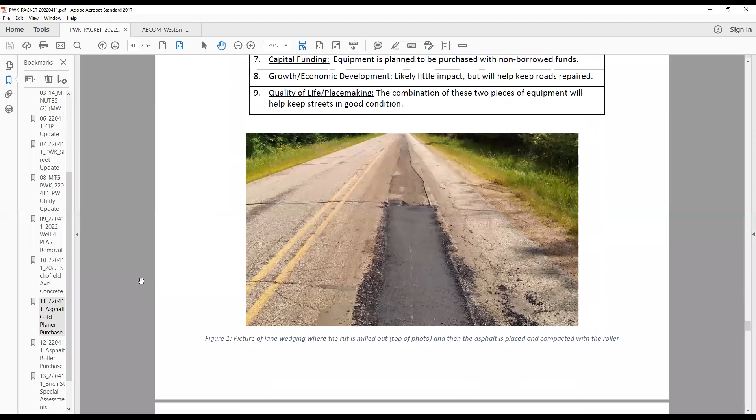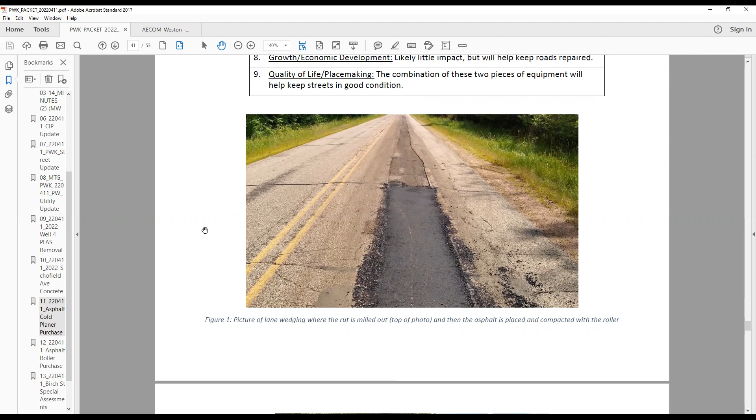You'll see there's some pictures, we did some work. Actually, two years ago we did a little bit on Ross Avenue, but it's a piece of equipment that definitely would get used. This is just lane wedging, oh, there was some milled out there too, I guess. But I think you look at the rental costs nowadays for equipment like this, I know $25,000 is a lot of money, but if it's maintained, it's something that'll last us a long time.

I'll move to recommend the village board approve the purchase of the CAT asphalt cold planer mill from Fabick for a purchase price of $24,500.

A second. I'll second. Discussion? No discussion. All in favor, signify by saying aye. Aye. Opposed? Ayes have it, thank you.

Asphalt roller purchase. I guess this one kind of goes with the mill. Once you mill it out and put the asphalt in, you need something to roll it and compact it. So again, we got quotes from two of the local equipment dealers. Low quote was from Fabick, Cat, at $29,731. We initially had an estimated cost of this piece of equipment at $35,000, so it's a little over $5,000 less.

What's the weight of it? It's about 4,000 pounds. With the water? That's the operating weight, so yeah, probably. It's about a 40-inch drum, I believe, on it. Is it 40 or 48? It's a 39.4.

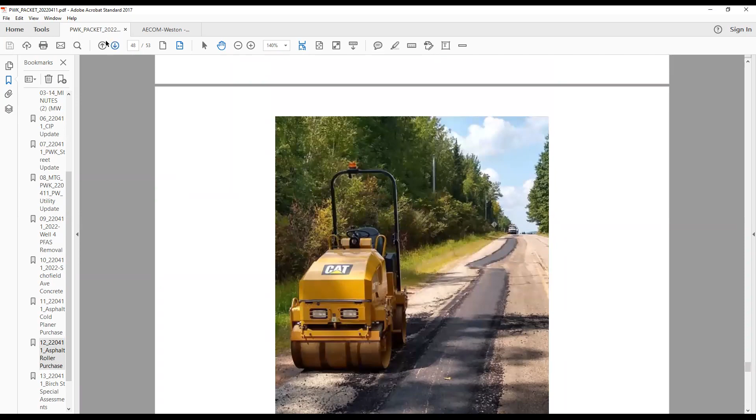All right, what's your wish? Make a motion to recommend the village board approve the purchase of a Cat asphalt roller from Fabick for a purchase price of $29,731. Is there a second? Second. Discussion? All in favor, signify by saying aye. Aye. Opposed? Motion carries.

Item 13, Birch Street Special Assessment Meeting. The bid opening for this project is this coming Wednesday. Once I get the bid costs together, I'd be putting together the preliminary special assessment report. I guess the main question is, I'd be looking to follow what we did with Apache Lane. There is one house that has main already fronting it. We'd be looking to install the lateral, so that house we'd just be looking at the lateral assessment, maybe not the main assessment.

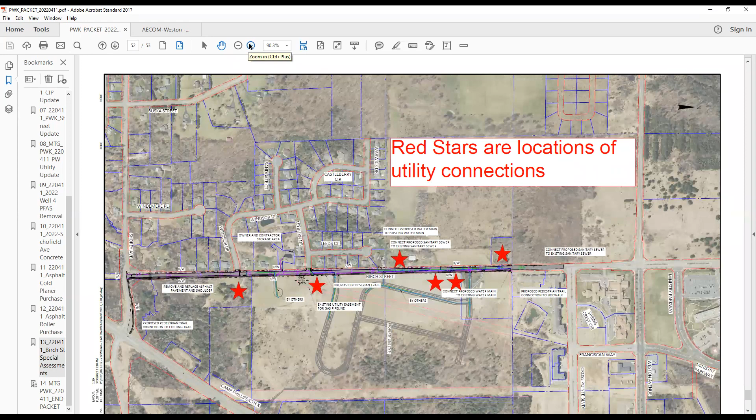So before the meeting, just making sure we're in agreement there, or we think, hey, if you're connected to the water system, you should still pay for a nominal piece of main. I think I have a map in here, it'd be easier to explain this stuff. So this, size of that main, Michael? It's an 8-inch, so it's nothing oversized, just a traditional 8-inch main.

So the water main that was installed on Birch Street for the Windemere Oak subdivision, primarily these houses on the west side of the road, is in existence. There is one house on this star that has existing main in front of it, but no connection. I'd be looking to add laterals for that one, so in the future we're not digging up a road in case they want to connect. The rest of the ones on the east side of the road, or the bottom of the screen, are all properties for the Denyon subdivision that's going in. Those ones I know will have uses.

This star up here, that one fits the mold of an older house looking to connect. Then the other question is this property is just shy of a full 40 frontage. It's one house existing, there's room for probably 4 or 5 additional houses in the future. But similar to Apache, with Weston Avenue, what we were proposing is they'd only get the one assessment based on that. Then if it divides in the future, if there's other connections, they would then pay an assessment at that time.

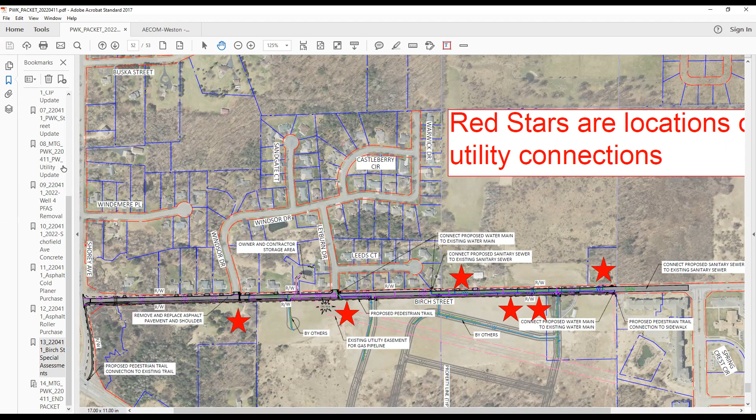Nothing more. I have a quick question for the administrator. I know you were talking to the Village of Rothschild about East Nick Avenue, reaching out to them about that. Has there been a meeting yet, or any conversations about that?

There's been a few, we've been trying to get a meeting with staff and the two chief elected officials. I did talk to Richard Downey, their administrator, today. I was going to resend an outline of what we were expecting as far as an intergovernmental agreement on the construction and maintenance of East Nick, the existing parts of it. I'll do that this week, and if we can make some progress - it's one of those things we've had no written agreement on. It's not unusual that we don't have written agreements with neighbors on some of these border streets, but we've always seemed to work things out with Rothschild and Schofield, and even in the past with Cronin. But for whatever reason, they haven't been willing to come together on this one, but we're going to keep trying.

And I drove down there yesterday and I see there's a road closed sign just past that last house. Has that been there for a while? Couple weeks. Okay, it says local traffic only. Yeah, the frost out. I did notify Mr. Downey that we were not going to be doing emergency maintenance out there right now during frost out, and if there was going to be any such maintenance needed, they would have to take care of that. That was based on the board's action at our last meeting.